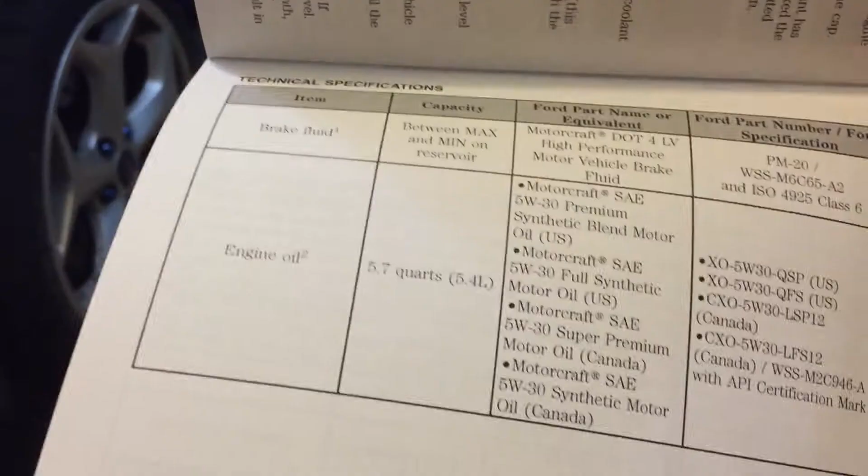Today we are in the garage and we are just going to do a quick oil change. Alright, so I just dipped into the manual here, talking about brake fluid right here. It's DOT 4, obviously, Motorcraft High Performance Motor Vehicle Brake Fluid.

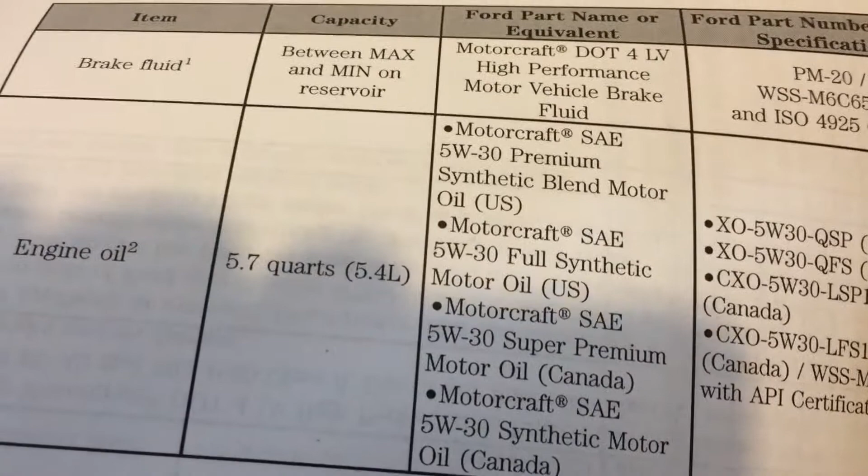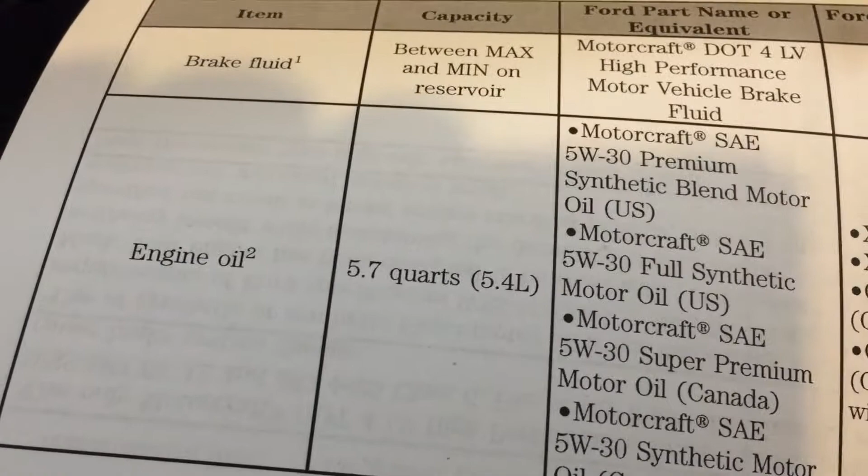In addition to that, we have the 5W30 Premium Synthetic Blend Motor Oil. Also a bunch of different other types of oil for Canada and for the US. It's a total of 5.7 quarts. So I only have 5 quarts, so we'll see if that's enough or not, or if I have to go back and get another quart and fill it up and check the dipstick.

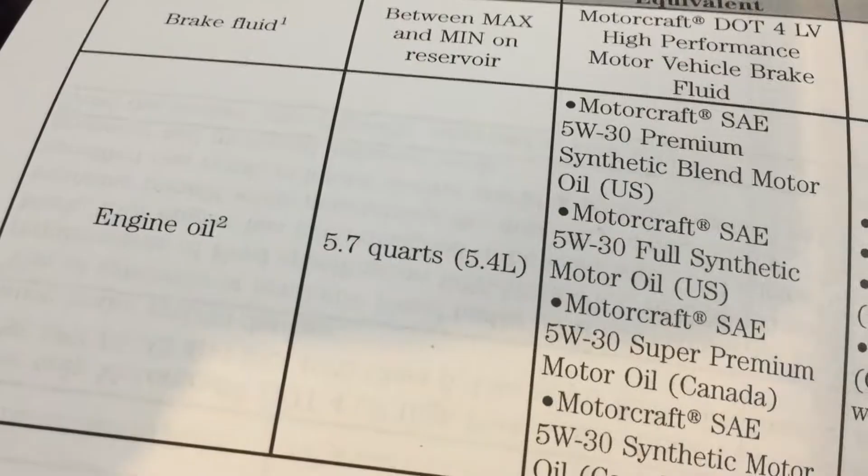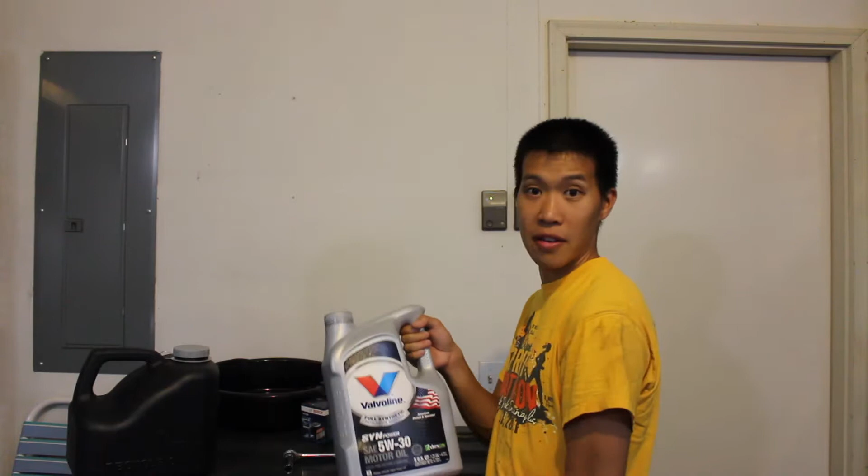This is the Bosch ST3330. This cost about $7. And here we have the Valvoline full synthetic 5W30. And these are 2 other items. This was $3. This is so when we take the oil out, it can drip right into here.

And you don't have to buy one of these. You can actually just use like a laundry detergent thing or something like that. But I just have this so that I can recycle the oil. And after I fill it up in here, I'll pour it into here. And this is 10 quarts, so this will be plenty for the Focus ST.

And a ratchet and a T20 Torx bit to get the undercarriage out, and then you need, preferably, 2 jack stands and a jack. I lifted mine up to about the third line on the jack stands, and yeah, I got plenty of clearance to get to there, and I have a 16mm socket wrench to open up the actual valve. So let's get to it.

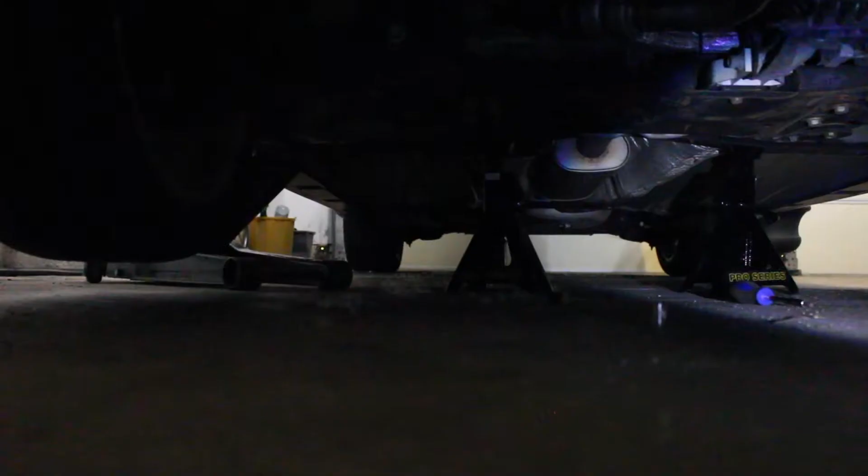So this is what I'm looking at underneath here. If you slide under here, and if you're claustrophobic, you probably shouldn't be doing this. So this is your oil pan here. It looks like it's been leaking a little bit of oil, or at least whoever emptied it out didn't clean it off too well. Also, usually you have to replace these bolts here. I usually change it out every other oil change.

So basically the 16mm will fall right here, and other cars have a better location for this, but the oil filter is right here. There's usually an actual tool that you can use to loosen this, but we'll just use our plain old muscles. So let's get to it. Oh, and make sure whenever you loosen this, you put the oil pan underneath it so you don't spill everywhere.

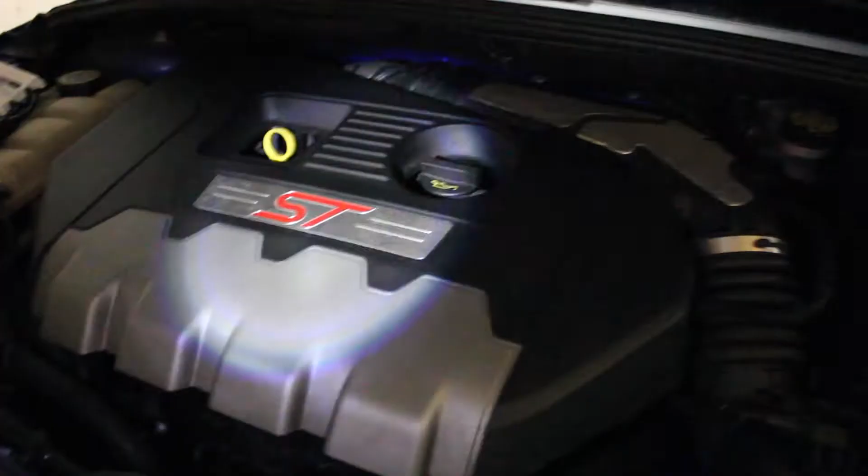Also, when you are emptying the oil, see that right there? When you're emptying it out, it actually gets better flow. In addition to that, you should also warm your car up a little bit. Make sure that the oil's a little warm so that it comes out quicker than it would if it wasn't warm.

Alright, there's a secret way to do this apparently. And that's to loosen it up slowly, and then eventually it'll just pour out. But once it comes out, just move your hand outwards, away from it. Here it comes, and it's going super far. And as it lessens, you have to adjust it too. And right underneath it, it actually drips down right here, so watch out for that also.

And obviously don't turn on the car. And yeah, just let it sit for a good, like, 5 minutes. Currently changing that oil.

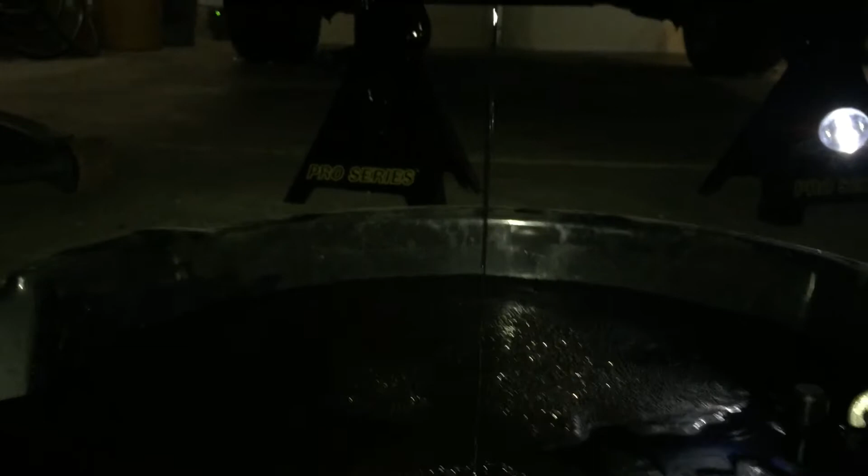Got a track day tomorrow. Ooh yeah, it's grimy. Oh, it's filling up towards this. Ah, I got my nut all oily.

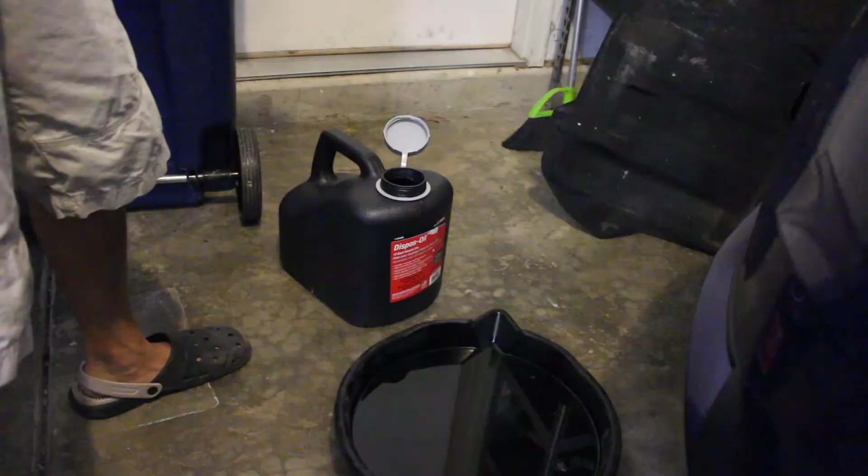Most AutoZones or O'Reilly's will recycle oil. So here we go, we have our disposal. Okay, nice and carefully. I'll take this back to them tomorrow and they'll recycle this, and then I'll use it again for my next round.

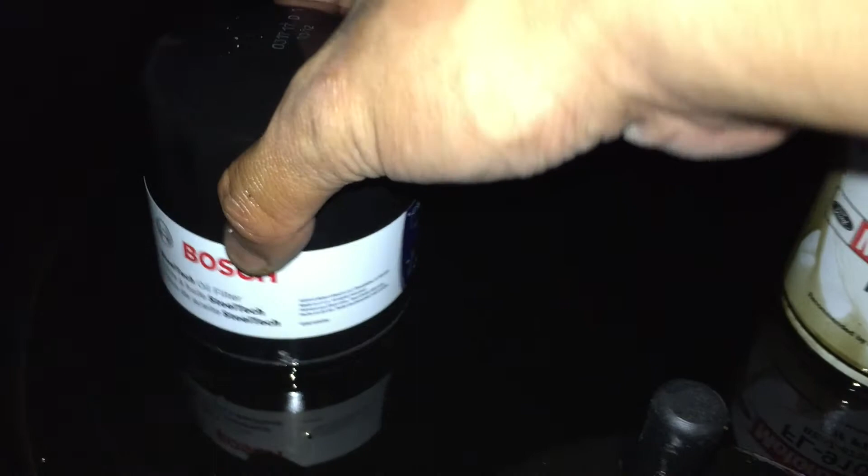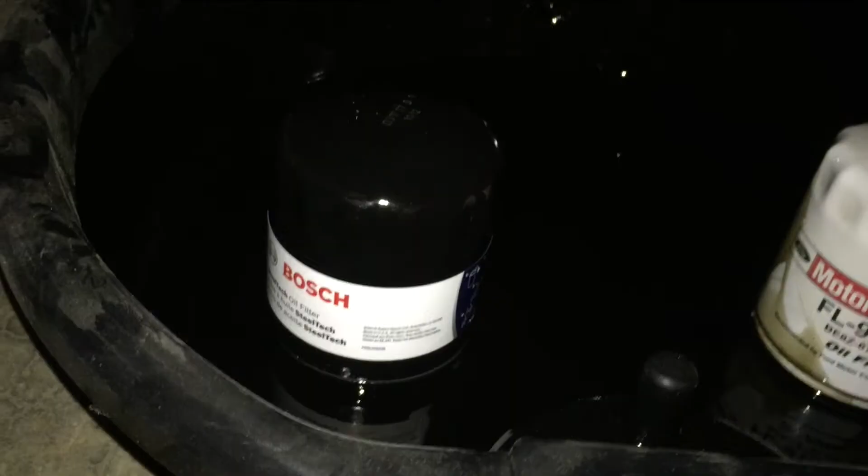Alright, we have our oil filter out, and this is filled up with a little bit of oil. I'm actually dabbing the bottom portion of this in there, because you're supposed to fill this up with a little bit of oil so it gets lubricated. And after that, you want to tighten that 16mm bolt.

And also, this thing is actually pretty difficult to get out. You have to get the right angle, or maybe I'm just weak, who knows. It's not in the ideal place to get it out, so just be wary of that. You could use an actual tool that grips onto here and pulls it out fairly easily. But getting it up into this spot up here is kind of difficult. It might take you a couple minutes trying to wiggle it out.

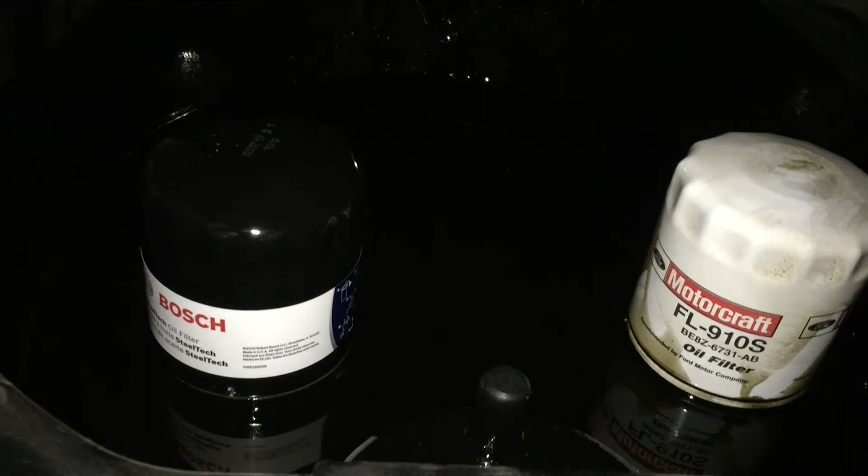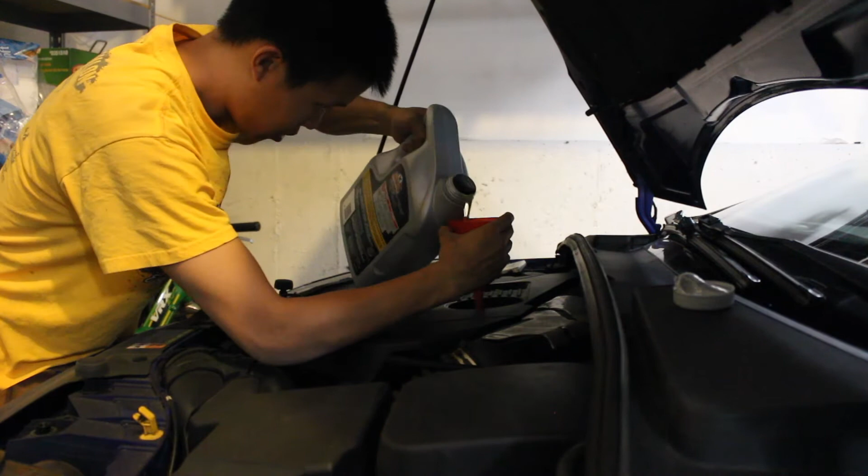Alright, moving on to that really fun part. Oil away. Lift this thing up. Yeah, this you have to be patient with. Just don't rush it like I was trying to. Okay, so what I just did was turn the car on, then off, and then ran the car for a little while. I'm looking underneath the car right now to make sure that nothing's leaking. And now I will finally put this pan back on.